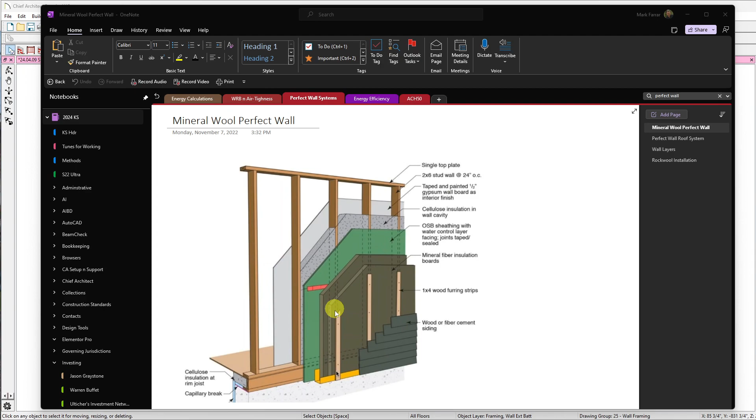So we've got a special wall. That's why I'm going to have these deck brackets, these MTW deck brackets, to keep the roof away from the main walls so we don't have a thermal bridge issue. There's exterior insulation and then these battens. You can pause that and take a look at it.

Let's get right into this. What I'm going to do real quick on this guy is turn on momentarily the wall layer, the framing. Let's get up to it. Framing, wall, batt. There we go.

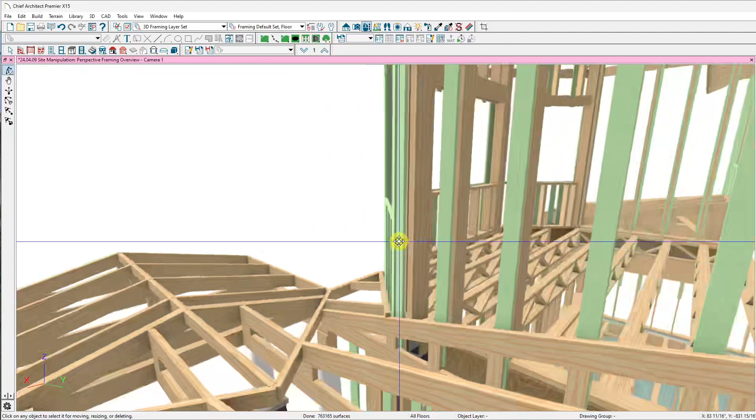So what you'll see is that these are just battens, and they've got a little bit of space between them, 3 inches between each stud and each 1x4. That's no concern of yours, except in these locations where the roof meets the wall. Those are over by the garage and right around the dining room. So the MTW brackets that you see in the link in the email are these guys down in here.

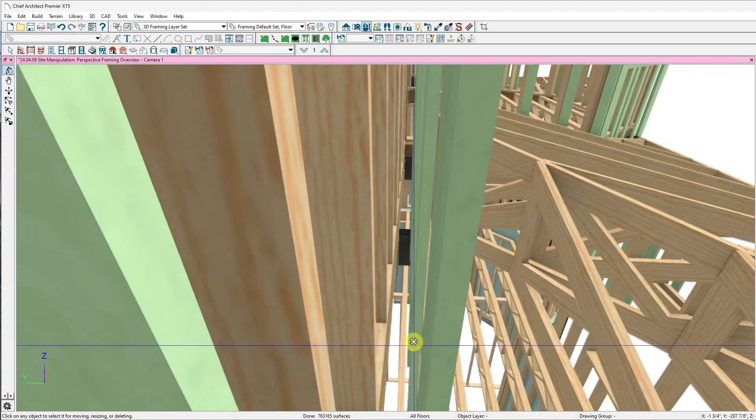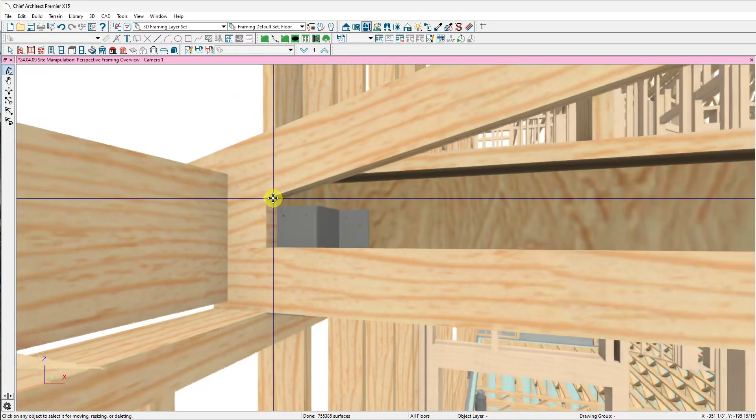Let me turn that layer off so you can see the brackets better. I just wanted to explain that real quick. These are the brackets. They'll have to trim off the bottoms of these guys, and you have the link with all the dimensions, everything you need to know about those. Hopefully that clarifies what I'm doing there.

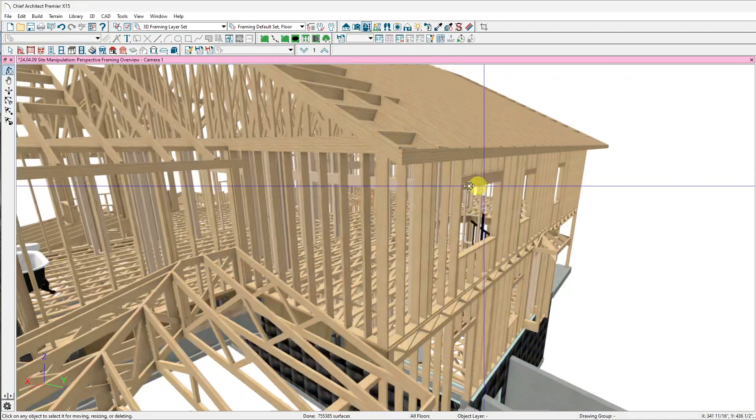And that occurs here mainly. There's some in here all around where roofs attach to walls - so through there and around this guy, and then around this last corner and over to the edge. I don't believe there are any more other than that. You'll have the software to do this on your own - I just want to make this quick and short.

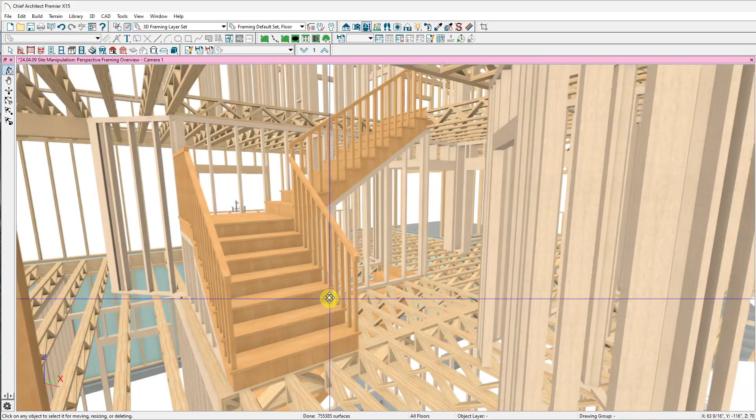Basically, the changes that I noticed you didn't have in your plan - this is where I've got some room issues with the stairs between floors. I don't have a lot to work with up here to bring this back, because this wall area right in here is in the way. So for the stair run, I'll check it and see if I can get those 14 inches in there. I have 12 shown, and if you'd like me to really walk through this for you, I will be glad to - just give me a holler.

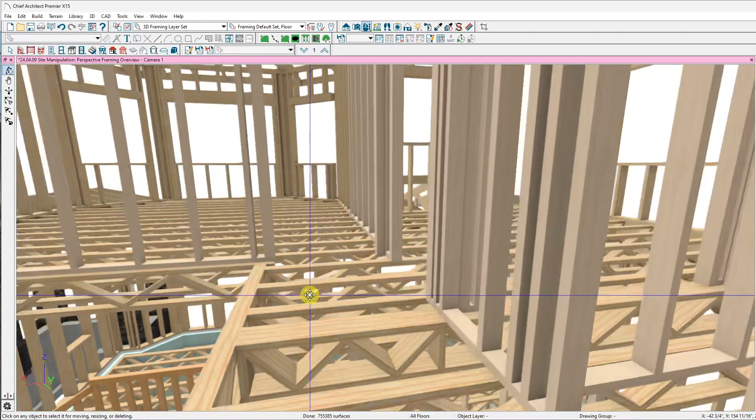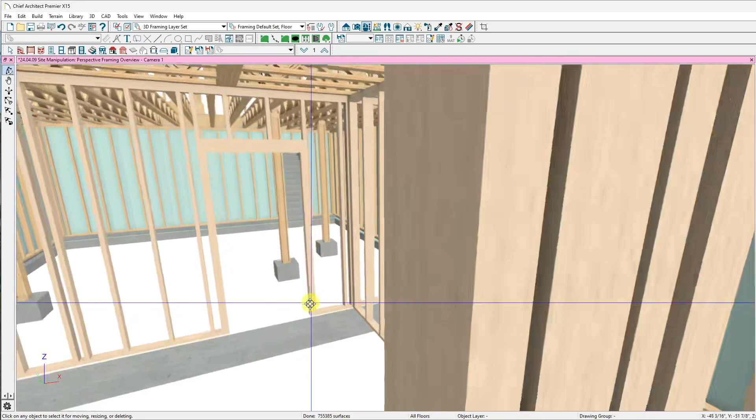As far as downstairs, once we come down, turn around, walk through - the tubs or the shower's not turned on upstairs, but I can get that on for you. I leave toilets and tubs and showers on so I can see where the drains are. So there's interior bearing through that wall, and then under this girder truss that I left for you up there in the ceiling.

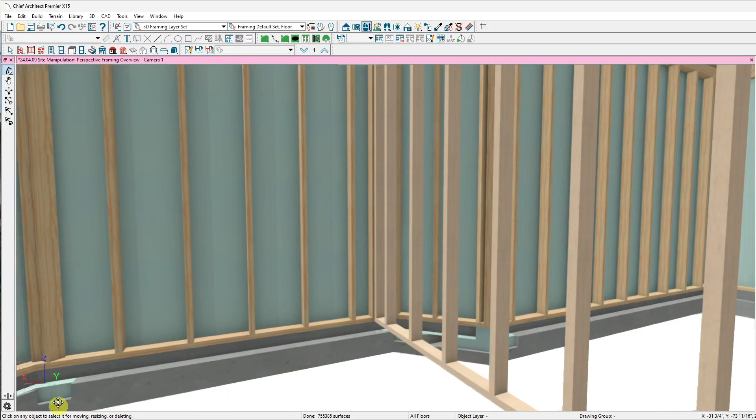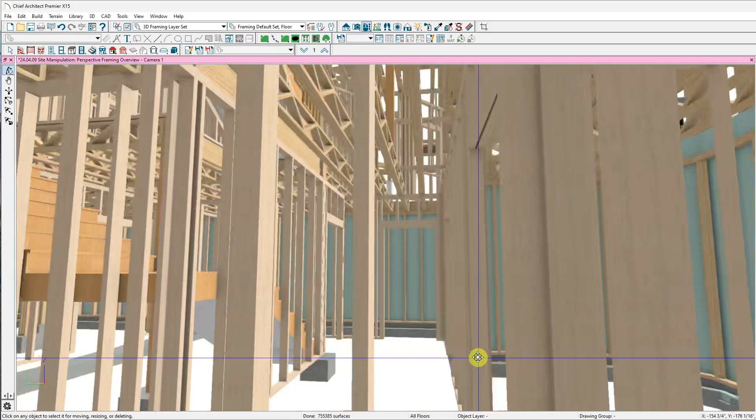So where I was talking about the change, the differences - it didn't render this portion of the slab very well, but the wall now goes straight out, and that portion of wall through here is now angled over and back out. These little patches and stuff I'm not too worried about at this point in time. I'll try to get those done before we have the material list for the concrete to be correct, but it's not going to be much off because of that.

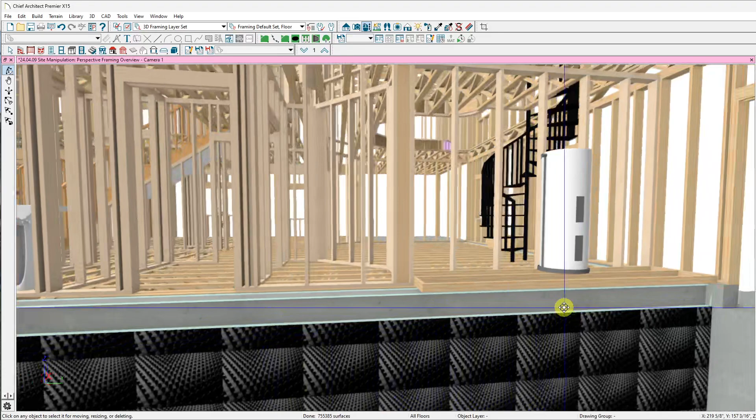The other area that is different is out here in the garage. So this is where the slab pours up against here, which is why it's showing that the Nudura block is cut away at the inside. It doesn't have to be - they may keep it, but the program pulled it away when I made the slab go across. So this is overframe to hold the water heater, and this is a vertical chase area right through here, right at the back of the garage.

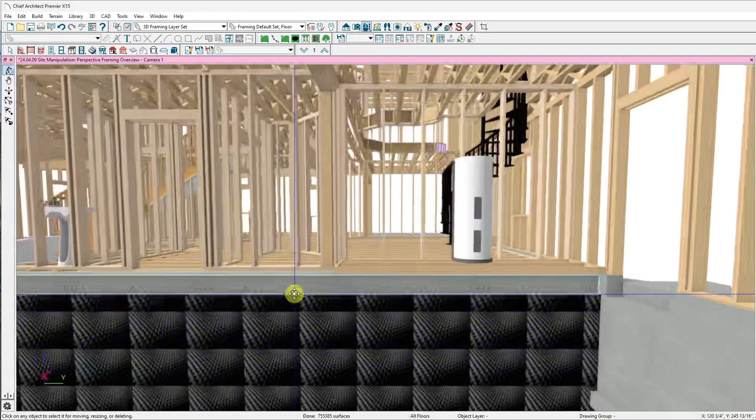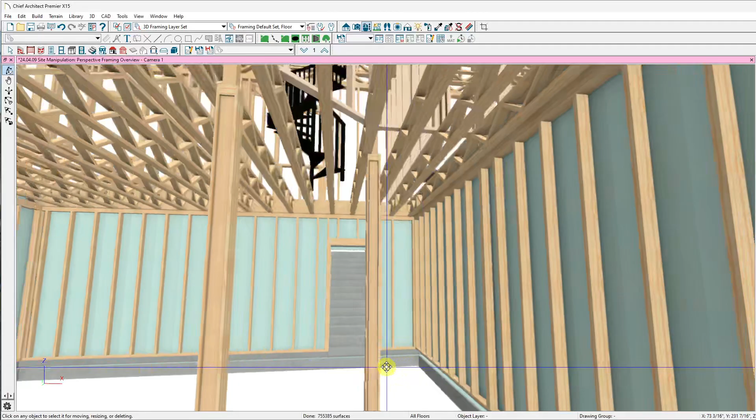I'm going to zoom out of the garage and then come back in, and you'll see that the last bit of this is actually where we get through into the basement through this gap and over into the mechanical room, which is down here. So if we even had to drop a plenum through here, I don't think Josh would be too upset. These columns were in here to hold up the balcony above.

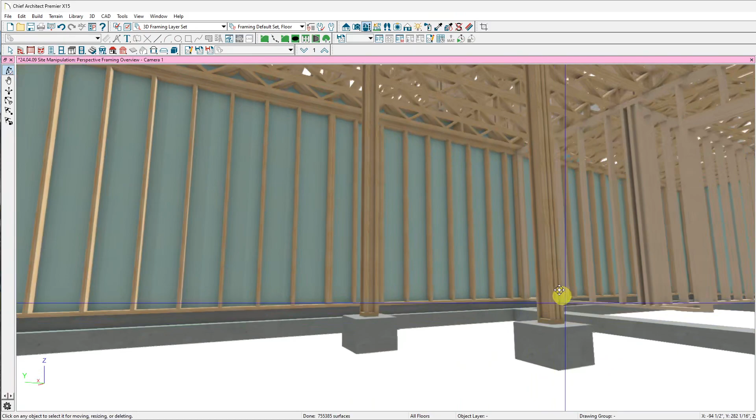Once I got this all framed out, I left them in there just in case you guys need them for anything, because they are approved by Josh. They're framed out a little bit so we can get electrical outlets in them. But I'd like to eliminate these three posts that are in the basement in the layout room if we can. So if you don't need them, let me know and I'm going to drop them.

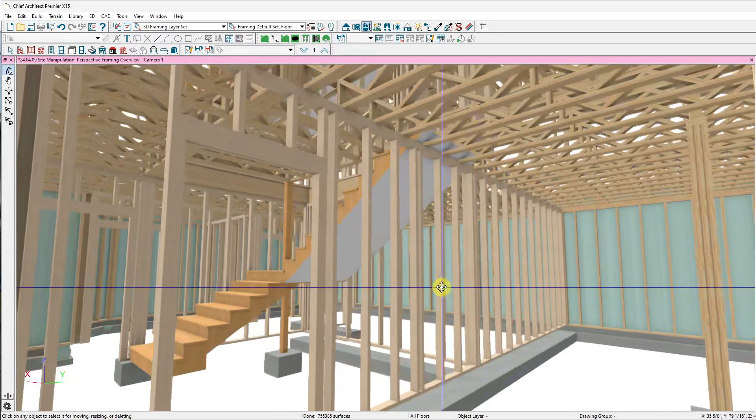But that's basically what's going on with this thing. I can't think of any other major concern areas except trying to get my stair runs to work properly.

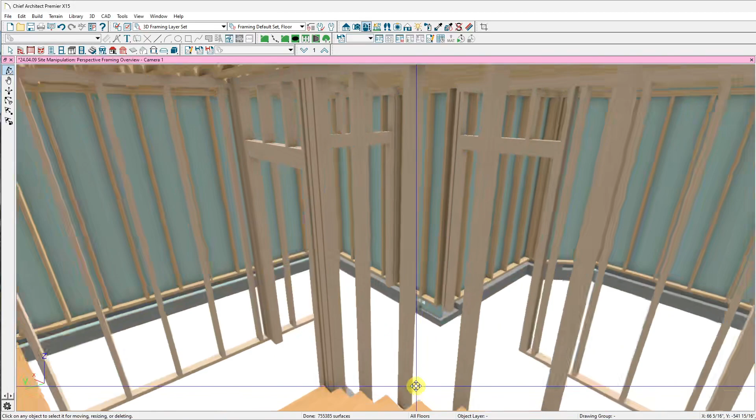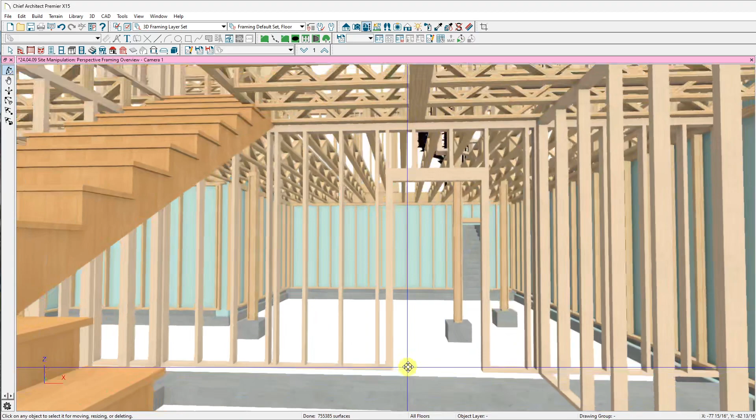So this one here, this lower stair, it's at the corner, so I can't extend up. What I was saying is that if we have to, whenever you make a turn I've got to put in a landing, and that just doesn't work. But I might be able to move that wall in one tread, which would move your bearing if I have to add a tread.

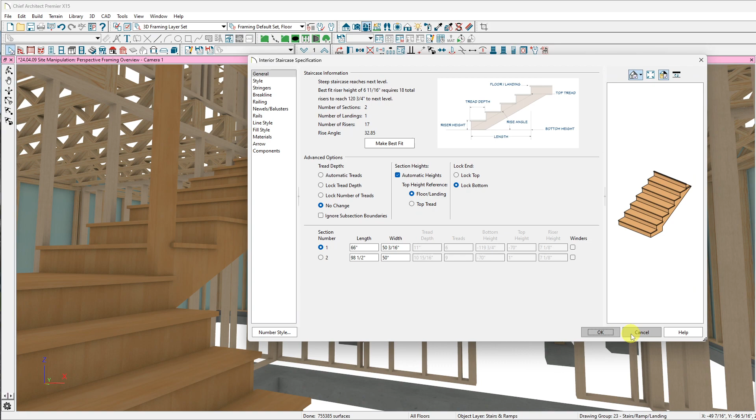So if we can avoid adding treads, I'll check the numbers, because right now you can see I've got a riser height of 7 1/8, and I'm allowed up to 7 3/4. So I might be able to get more height in there without increasing the number of treads. I'll check that stuff out, see what I can do, and then we'll push this thing up. It'll be some pretty serious rework on my part, but that's the way it goes.

So the other area I've got is there's a lot of code to do with spiral stairs, and it can probably come out. Yeah, I think we've got plenty of head clearance.

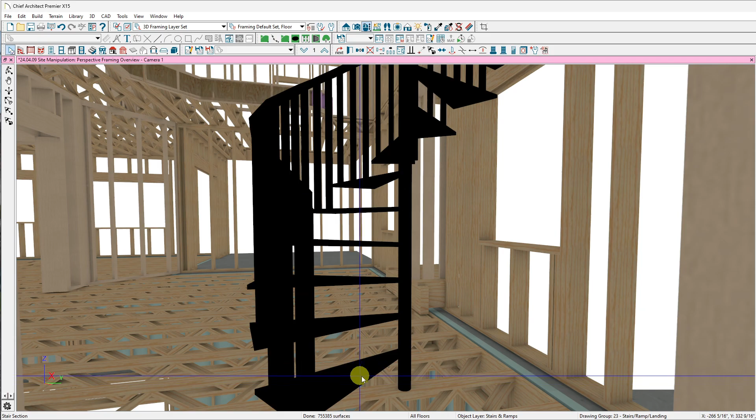So I could, if I need a couple more steps, I can put those in. They'll just have to come around to here to go up instead of being able to enter from either direction. Be a little bit of an inconvenience, but that's the only solution because I can't really change where the top ends.

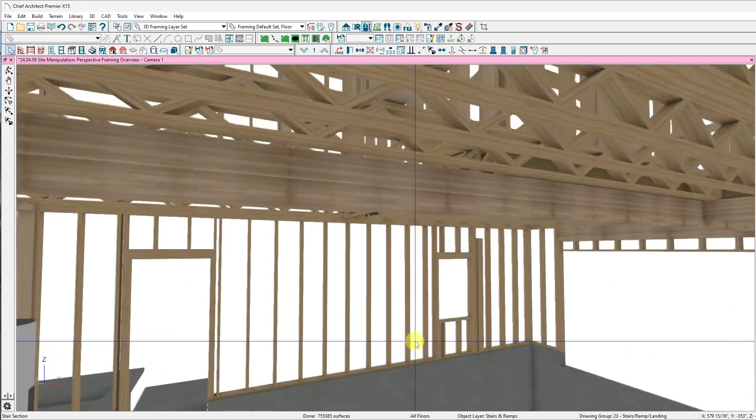So all these guys run through, and then I put beams in. If you've got another solution—the program doesn't show standard brackets, so I just assume we've got Simpson brackets for here. So like this guy that's raised, that is...

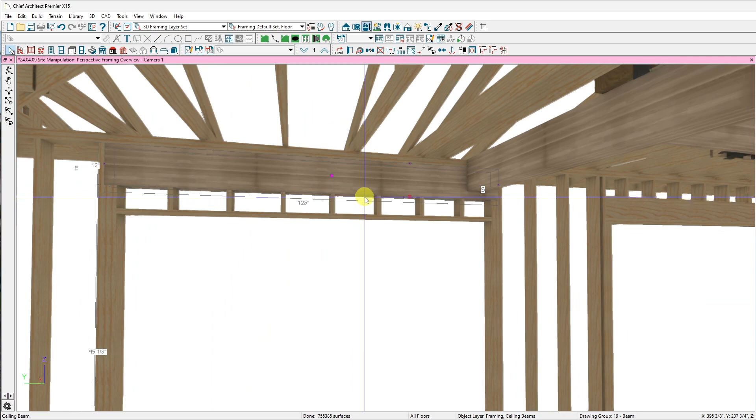5.5 by 12 in that portion of the garage. To suspend this free span, this one is 7.5 by 12, and we may have to increase those, or if you're using a truss to do the whole thing, wonderful. Just got to be careful of the garage door openers. So these are up higher, and this last one that crosses here is 7.5 by 9.

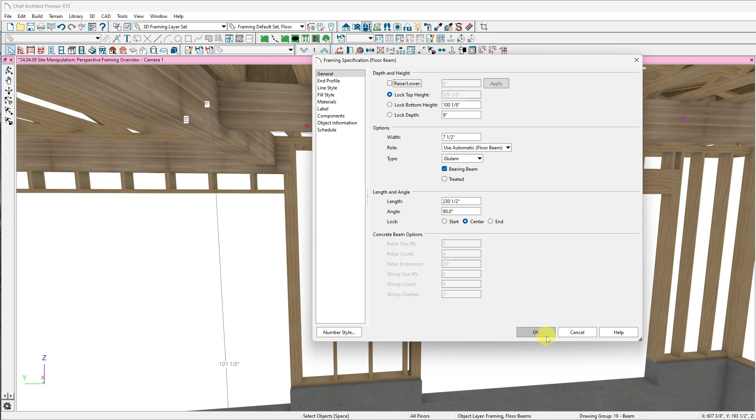That's what I have shown. I have not sized anything because I didn't know what your reactions were yet. So hopefully those will work.

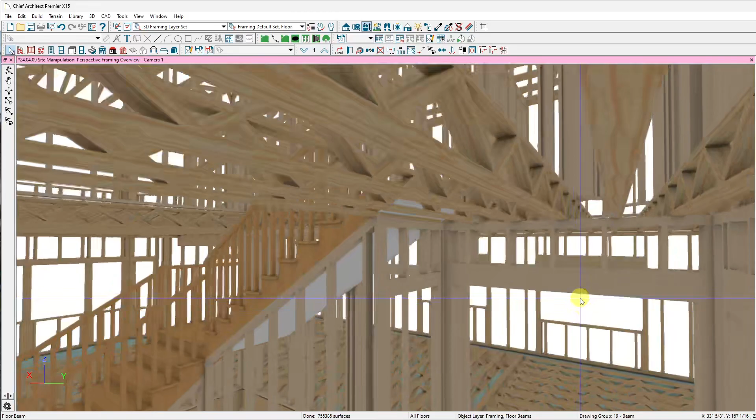And like I said, the toilets here, we got a great layout for that. I'm not concerned about the sink, it's just on that same layer. And then upstairs I'll turn on the tub or the shower so you can see where that drain is, and we can make sure that we don't interfere there. I think the toilet's over here too, so this one lands right in there if you're working directly with the layout that I provided.

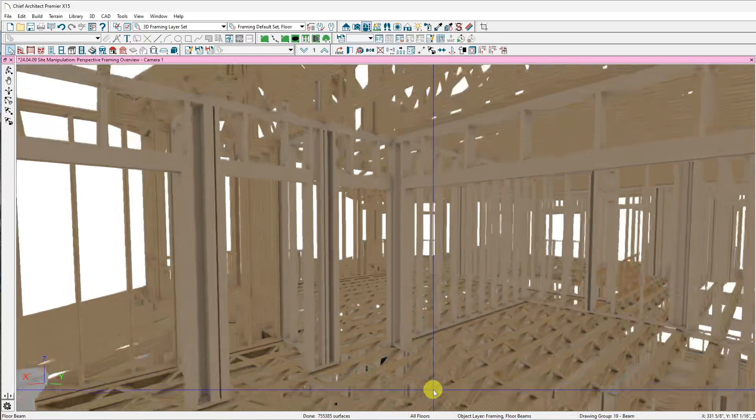So that's it. I'll give you the model. I wanted to keep this as brief as possible. And if you have questions, feel free to give me a holler.

And if lighting is doing that to me in my program, I just gotta turn the lights up, turn it back on, say done.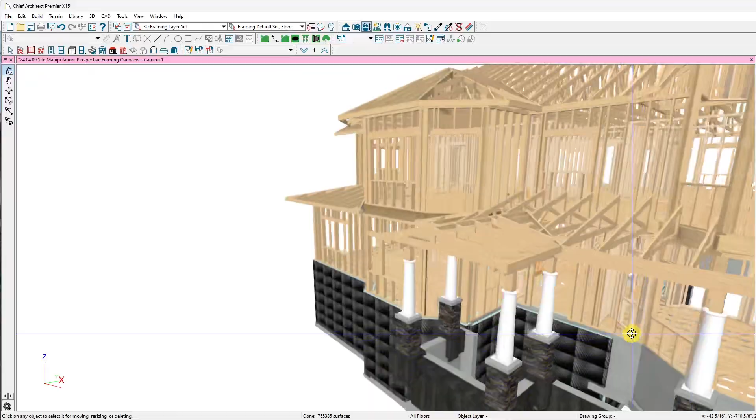On occasion, this guy up here looks like you've got everything the way I was talking about. I assume the trusses that go down and back up here, you're planning on overframing that so it drains properly.

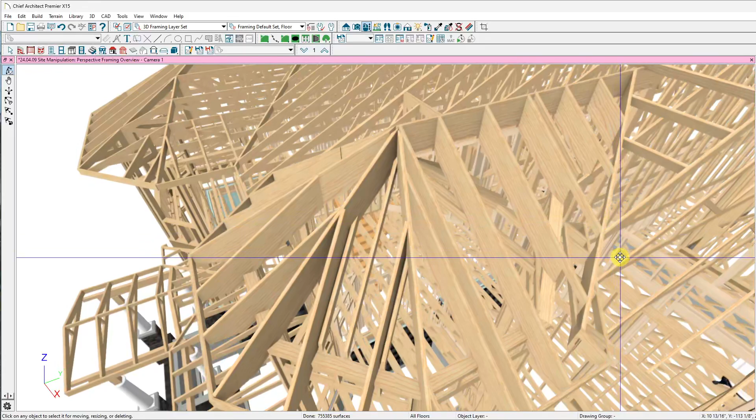That all looked fine. This gets a little strange in here. It's difficult for the model to understand it, so I did a lot of manual stuff in here, but I got it pretty darn close. It's mainly the layout we're looking at.

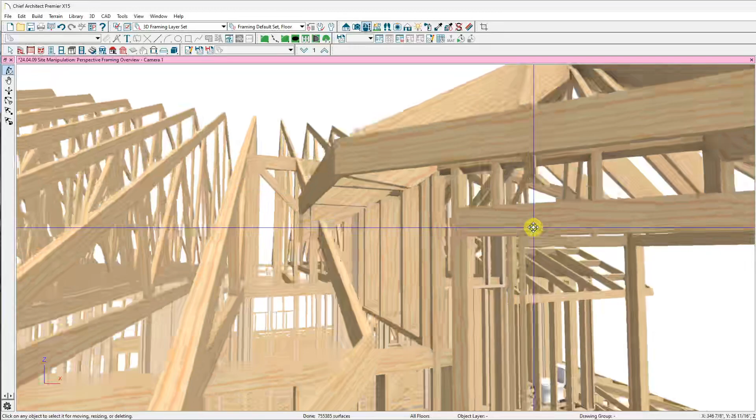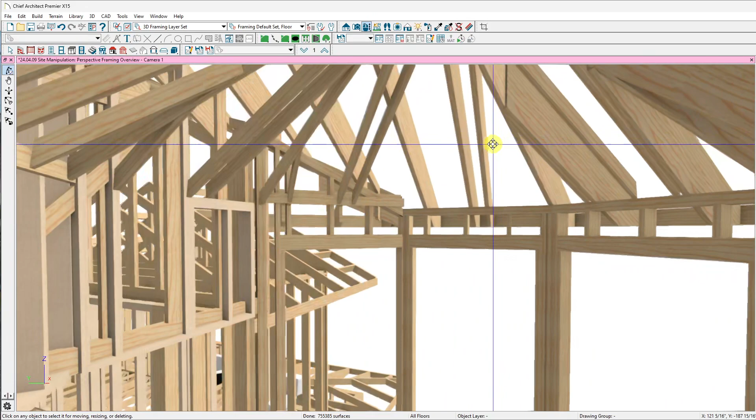If you have any questions there, this is a true vault in this ceiling. These were designed as 2x14 to give us the depth we needed for the insulation, but the ceiling had ceiling framing in it, though it's not a whole lot lower. I don't know if that's where you built in your trusses, but just understand that this is a true vault.

I'm going to pause the video. I'm going to just take you in that room real quick. So this is what the house looks like as a whole.

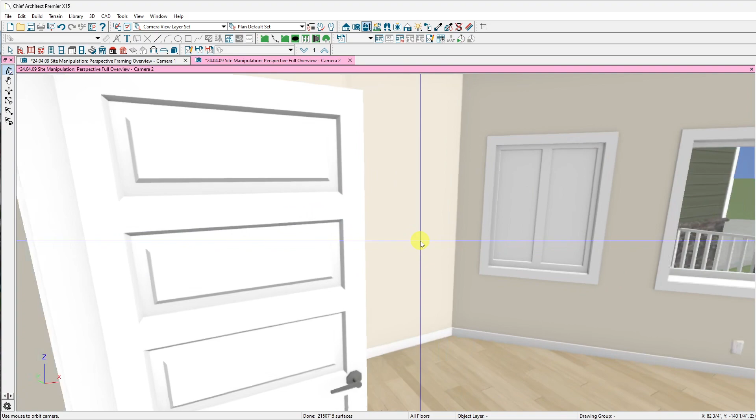So come in the door. I've got this guy here. That's the den. I can chase in this triangle if you need any chases there. I know you put in some horizontal runs for me.

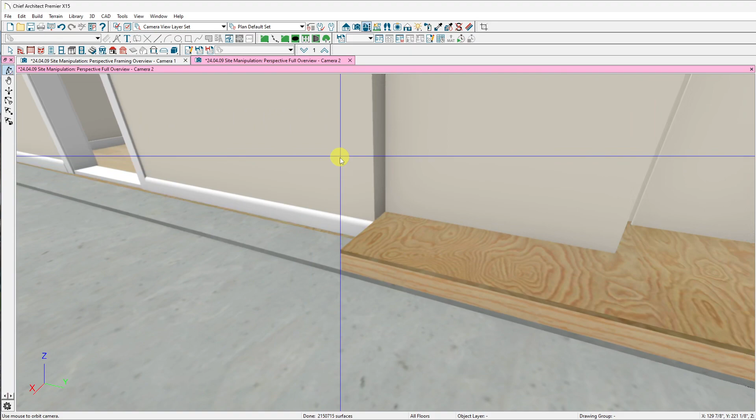The more likely area was right behind this wall, in the garage, where I was explaining that we can put in this vertical wall, and that can all be chase area. I can even extend it, because I thought they were putting their chest freezer in the garage. They're not, so we've got all this area to work with, except we do need area for that.

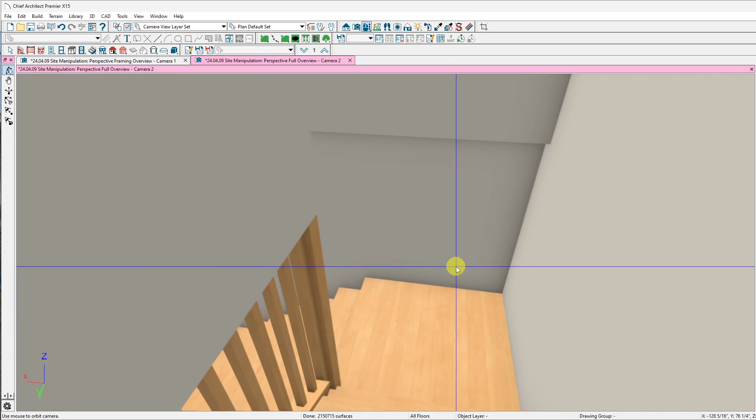Here's where my issues are with stairs. I come down, get down here at the bottom, and I'm hitting a wall. Don't have a lot of room to work to get through there, so I'm trying to preserve that room.

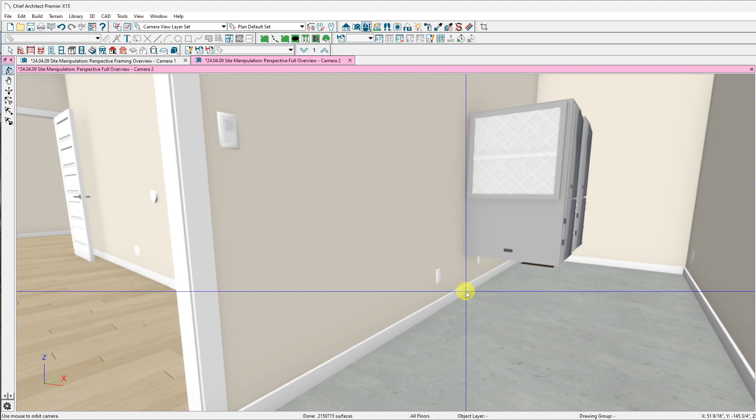But behind here is the mechanical room. Be nice if it was this wide, but if I have to gain a little bit, I will. Also trying to work with those stairs.

Like I said, they were not as tall as they could be, but I don't know if I can get to 16 risers. That's my main issue, trying to get to 16. I could probably get to 14, and then I'll have to change this guy to get out to grade.

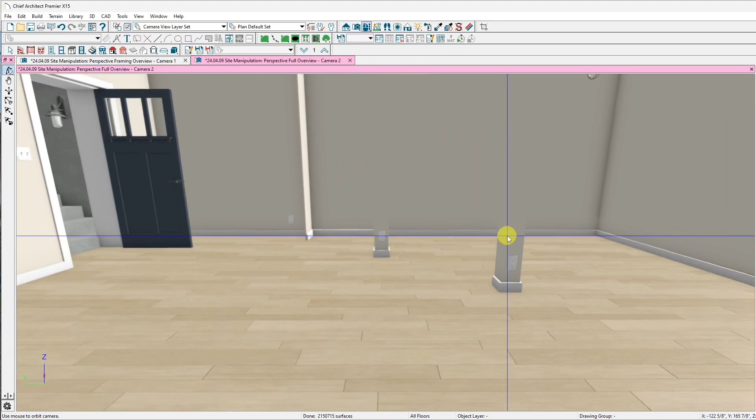So these are those posts I was talking about that have the electrical in them.

Then this is the room that changed as far as what you saw. So there's the angled wall out to that concrete. This is the computer room in the labeling.

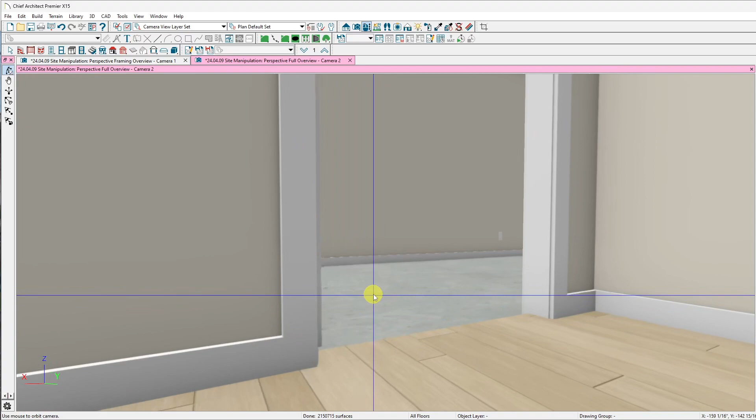Oops, sorry. And then this is the firearms room. So it has kind of a dead space corner there, but it's got a little piece in it so you can clean it. Other than that, I think everything else is the same.

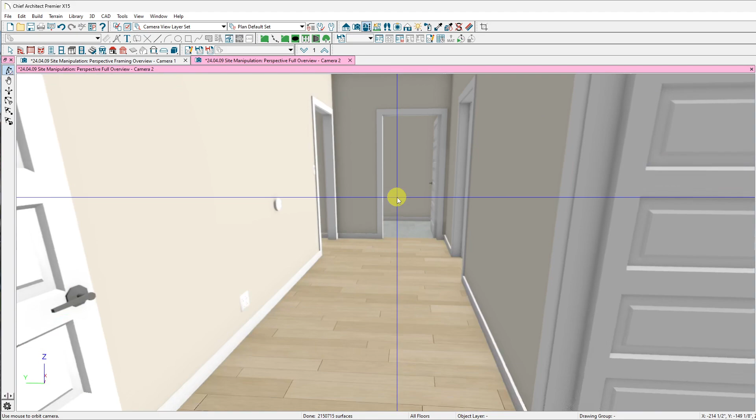This is that continuous wall you're using for bearing. And then on the outside, there's a girder truss that's in the floor system up through here. So anything you can do to help me keep the floor trusses down to 12 would be awesome.

But let's see if we can deal with 14s.

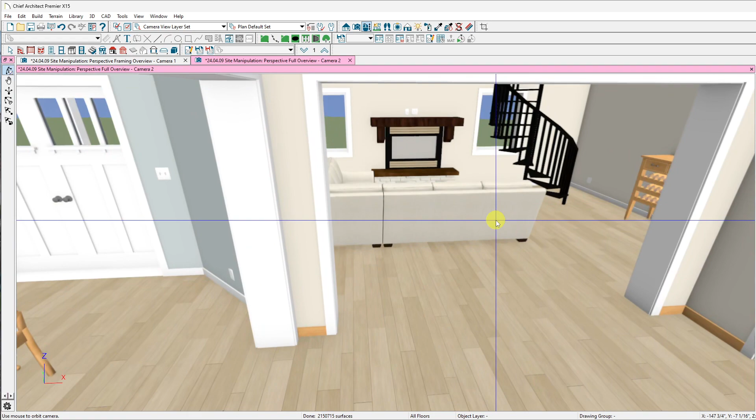I will get you the model. I'm going to get you just the framing model, and I will create a link to this model too, and then I'll ship that along later.

So if you have any need to look through the house itself, these are not 2 dining rooms. This is just here so they can choose a table.

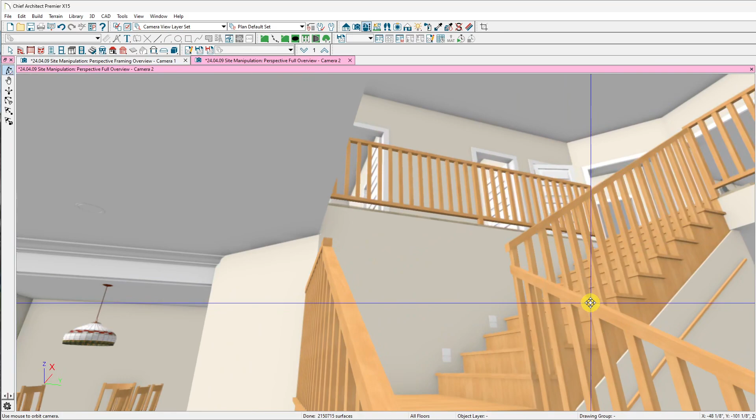But if you need to be able to walk through this and understand it, I'll upload that and send you a copy of that too, so you've got everything up to date, and can see the model with and without walls.